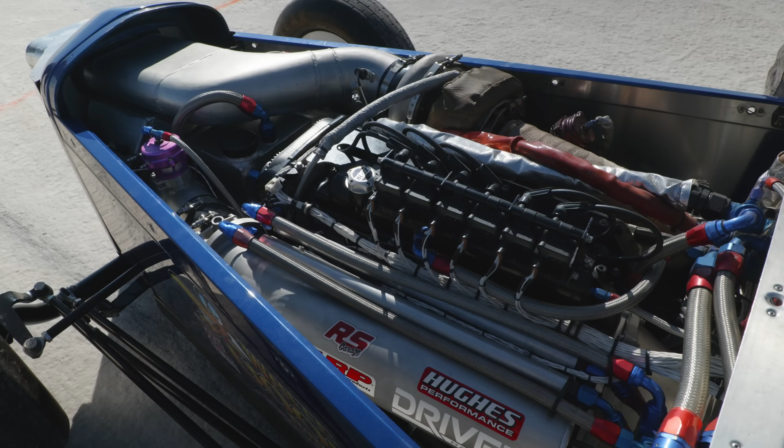First, we're going to jump into Greg Waters' 369 Roadster. The 369 Roadster is powered by a factory block 2JZ with a bunch of Brian Crower goodies that you can purchase through RS Garage or just have me build you an engine like it. It has a Dailey dry sump, VVTi cylinder head, Precision 8685. It's backed by a stock ratio TH400 trans with a 2.49 final drive, so long gearing.

And one of the things you'll notice at Bonneville is the vehicles are being pushed off the starting line. So this particular vehicle gets pushed to around 45 or 50 miles an hour. Driver floors it, the race time starts, and the run begins. I say race time because it's an interesting metric to look at how long the run is. So when he lets off his throttle out here, he's around 70 seconds of wide open throttle operation.

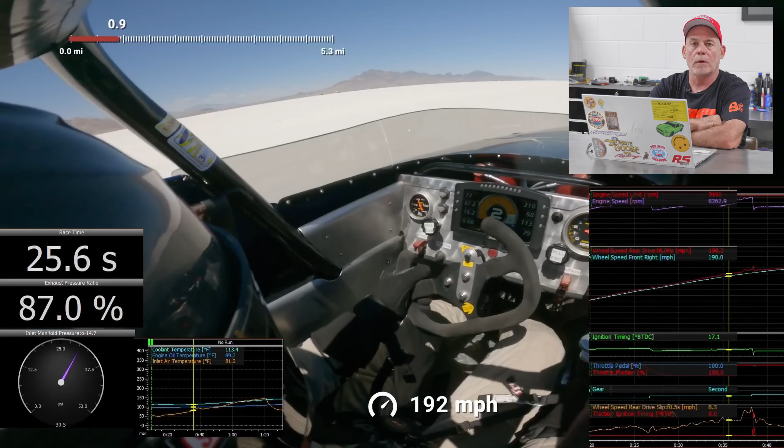And that's what really separates running a vehicle at Bonneville versus a drag racing environment or a chassis dyno environment or an engine dyno environment, is you have your engine and your tuning in a real world condition under real stress, accelerating the vehicle to get a time slip. So, you know, as the dyno crazes over the years have come and gone, the one thing that everyone that worked for a time slip got was a time slip. And that's a real metric of how the vehicle performs.

And this particular run, to go as fast as we did with a small engine Roadster and get that time slip is quite an accomplishment for the group. And some of the men in the camp that have larger engines came over and said, wow. And it's a pretty big wow. So T4 turbocharger, 2JZ, methanol, MoTeC, neat combination of parts, and a pretty good running engine. So let's jump into the run.

As far as spooling up that 8685, if you look down here, we've got over 15 pounds of boost available, just over 5,000 RPM. So pretty good response.

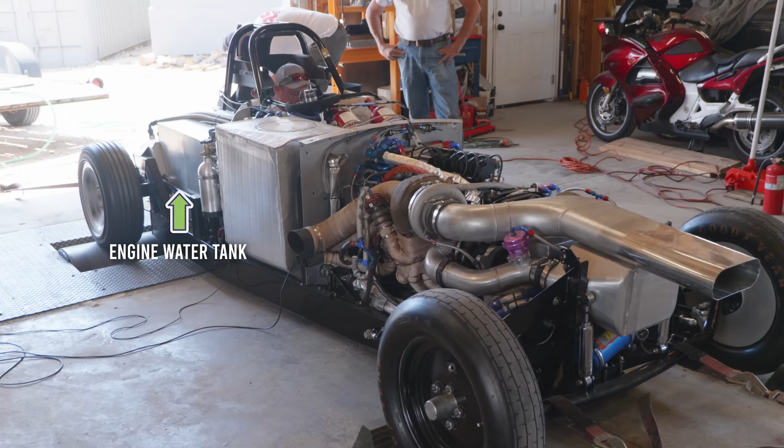While we're at the beginning of the run, let's also take note of the coolant temperature and air inlet temperature and the crankcase pressure and the oil pressure, because as the run goes on, some of those things start to deteriorate and some of them stay pretty good. So this car does not have a radiator. It's just a high volume coolant tank. And it does have an air to water intercooler with a big ice chest to help maintain these IATs over the course of a run.

The IAT sensor is a fast response RIFE sensor, so we are using good data, which is going to help us keep our fueling in check, as the MoTeC is a speed density system, and it does take the actual air inlet temperature into account when it's doing its math.

So start of the run, 93 pounds of oil pressure, 65 kPa of crankcase pressure, 49 degrees of inlet temp, 114 degrees of coolant temp, around 15 degrees of timing, 12 pounds of coolant pressure. So we get to the top of the gear. We now have almost 37 pounds of coolant pressure, and this may seem like a large number. This engine has a 3-inch diameter water pump impeller. We're moving a lot of water, as much as we can.

And we want water pressure present because in a perfect world, everywhere inside of that engine would be relatively the same temperature, and you'd avoid localized heating. And how you avoid localized heating, which will then allow cylinders to lose control, is lots of water flow, lots of water pressure. That way you're scrubbing that water against the aluminum, scrubbing that water against the cast iron, trying to carry as much heat out of the engine every time the water enters the engine compared to when it exits the engine, so that you're scrubbing heat out of the inside of the engine.

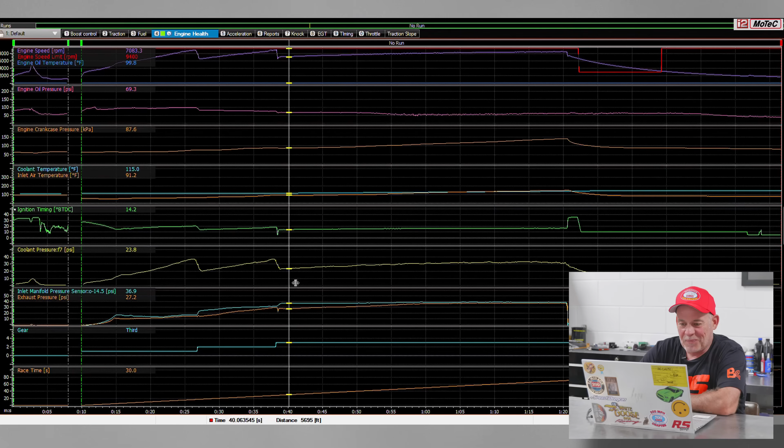As the car makes its way down the course, you can see the exhaust pressure and boost pressure get closer to one another, and we end around 39 pounds for around 37 and a half pounds of back pressure. Our oil pressure, however, has now decreased to 63 psi. Throughout the week, we moved through a couple different brands and a couple different weights of oil, trying to figure out if there was an advantage to be had. We ended up back in our Driven 1040, mainly because the oil condition at the end of the run was better than the other brand. It wasn't milkshaking with alcohol. The oil was staying pretty dang clean, which is pretty impressive.

Our inlet temps have now swelled up to around 144 degrees, and our coolant temp is up around 137 degrees. Ignition timing out the back is almost 17 degrees. On the dyno, this engine wanted 19 or 20 degrees. Were we over timed or under timed? Maybe. We can tie in some of this knock data that we have here. We're not using the knock control as closed loop, but we're collecting data, and pretty consistently in second gear, we've got some noise coming out of number 6 and some noise coming out of number 4.

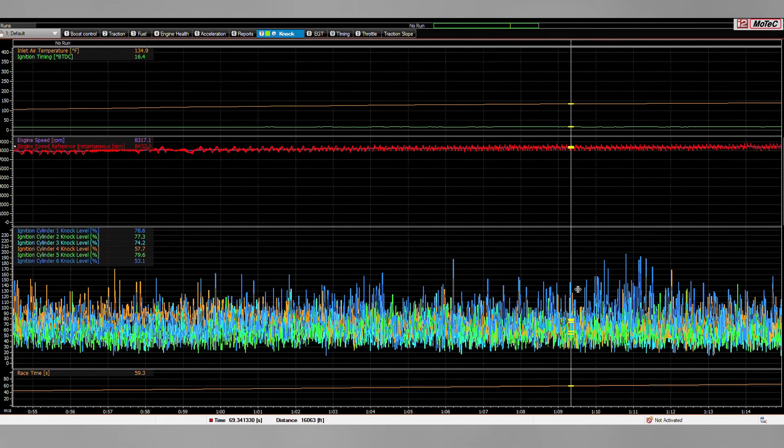And as we get out here in high gear, we have a bunch of noise coming out of cylinder number 4, and then it's sprinkling along with cylinder number 6. So you have some cylinders that are very quiet and some cylinders that are very loud. And knock tuning, especially on alcohol, can be tricky, and you have to run the engine and look at the parts. So we weren't collecting any aluminum on the spark plugs. The spark plugs weren't overheating.

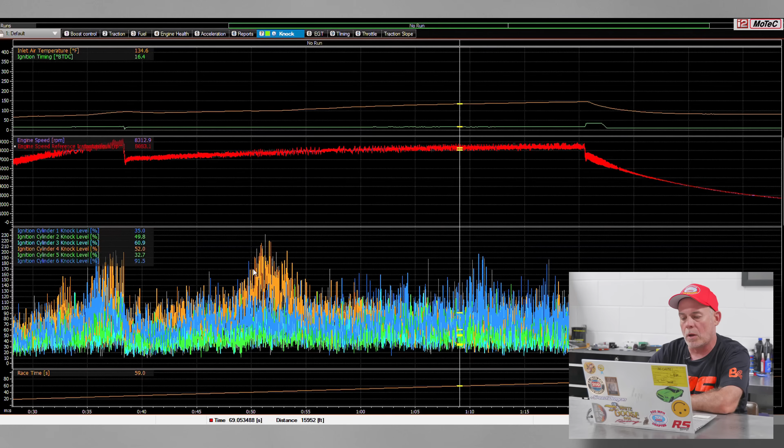But when we take the engine apart, we'll look at these bearings and say, hey, do we have anything going on in number 4? Do we have anything going on in number 6? And kind of take that information with us to move forward.

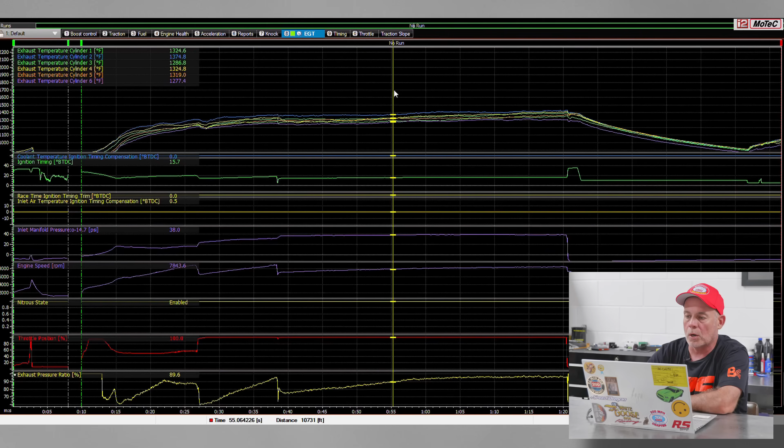The car also has exhaust gas temperature sensors. So number 2 was a bit warmer by about 100 degrees throughout the run. These temperatures are 300 to 400 degrees cooler than what we had when we were running the car on gasoline or ethanol. So the methanol is a lifesaver when it comes to managing heat, but our pairing isn't as tight as we'd like to have it. And some of that may be ignition related. Job and Brett worked together this year to do some testing on his snot rocket, and they ended up with a CDI box, which improved some of the exhaust gas temperature behavior and less misfires.

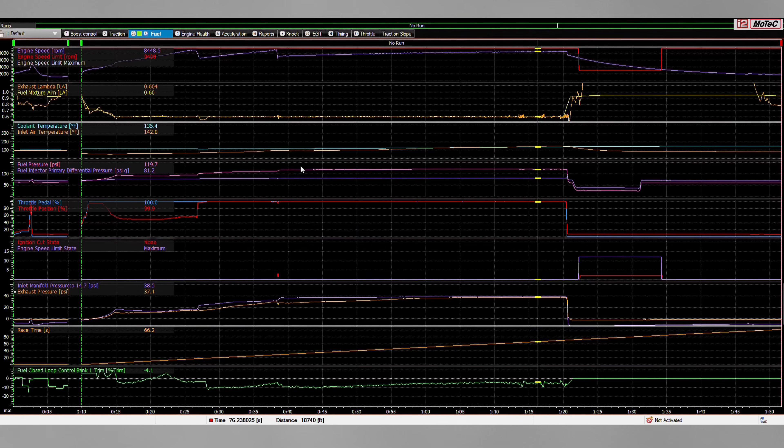If we look at the fueling real quick, we can see out here, we've got these couple bunches of fuzzy lines in the lambda. And if we zoom in on that, you can see that we had some racket going on here. And this could just be misfires. So we're going to change the ignition system and try to get rid of some of these fuzzies in our lambda. If you look at the lambda trace throughout the run in high gear, it's fairly consistent.

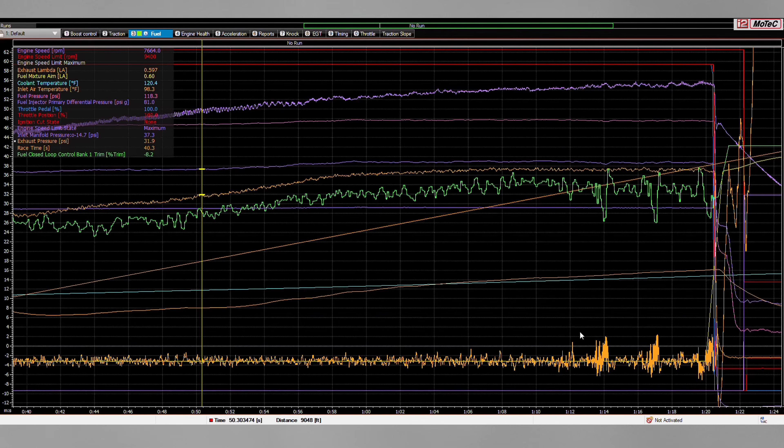But out here, we've got these blocks of fuzzy and these big trim swings in the closed loop. So we went from closed loop numbers that were fairly small, 4, 5, 6%, and then out here, we had almost 10%. And we could be incurring some misfires that are influencing this change here.

The traction was fairly managed. A gorgeous run. One of the runs that you're like, hey, that was a run. Again, I'll keep saying it because I was waiting for this time slip for some time. But we have a little bit of wheel spin in first. Nothing crazy out there at Bonneville. If you're under, say, 15 miles an hour worth of slip, you barely feel it. He did have a little bit of slip at the top of second gear. He never lifted his foot off, but it was happening.

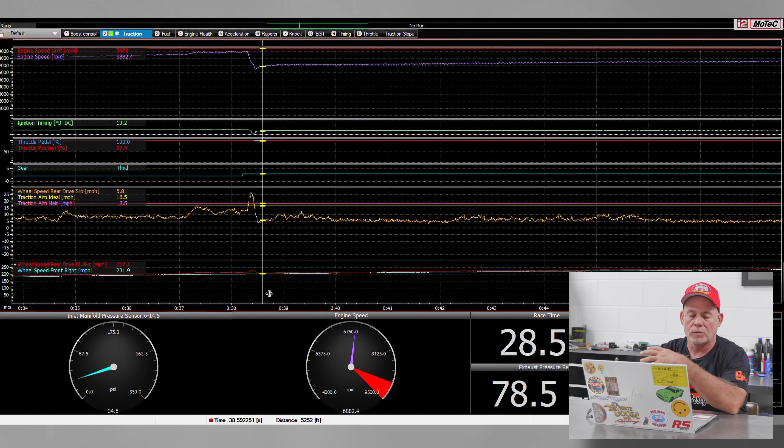And as he goes into third gear, there's just a little dip right here where the traction control pulls some timing out as the wheel slip goes up over the threshold. So on the 2-3 gear change, it did wick the tire loose. The computer responded, pulled the wheel slip back down, and away he went. But pretty cool run out of the Roadster.

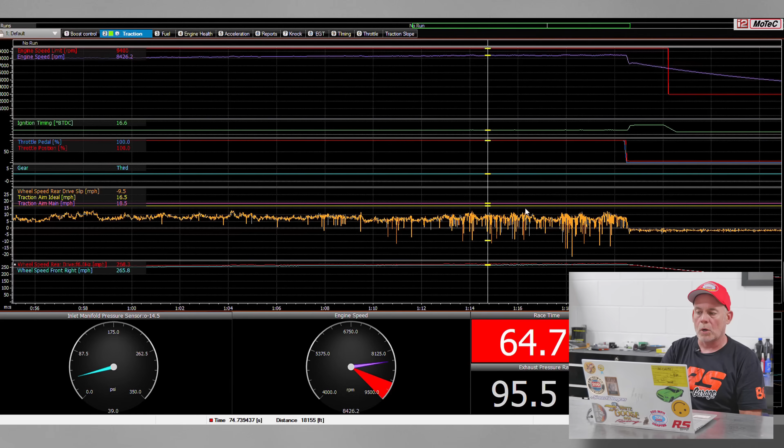Before we move on to the liner, if you're catching all this fuzzy out here, if this is bothering you, it's not real. Tuning wheel speed sensors on these vehicles, you got to run the speeds. So it's a game of try this, make it run, try that, make it run. This car has pretty good wheel speed data until around 250 miles an hour, and then it just gets crappy. We're going to work on that a little bit and try to get it cleaned up. All you can do is tune it. This is one of those things. A race car evolves over time. But that's our 369 run.

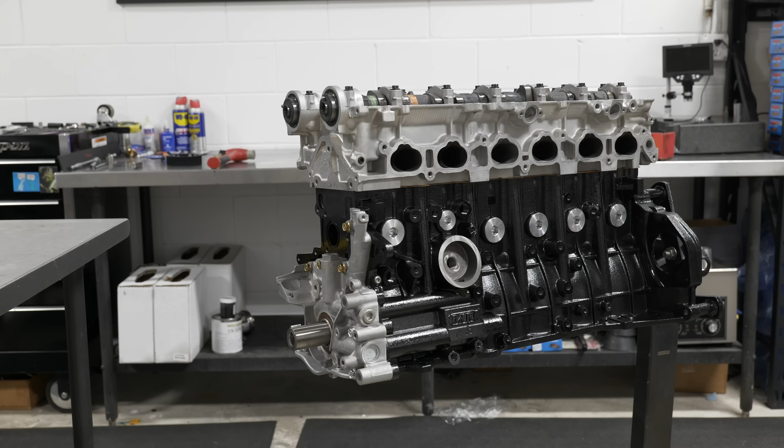Next, we can take a look at Brad Bosworth's 987 Valley Fever Streamliner. The Valley Fever Streamliner is a mammoth of a vehicle to get the pilot, and it's powered by a Dart-based 2JZ with 2 Precision 6466 turbos. It's got a Liberty equalizer, 5-speed, and a quick change rear end. The gearing wasn't quite right on the car, so we did cross in 4th gear.

There's a 13% drop between 4th gear and 5th gear, and by the math, the car was geared for around 450 miles an hour, and I don't think it's going to do that anytime soon, but it is a capable 400 mile an hour vehicle, which is pretty amazing considering the engine platform and the time that we've had to run the car and practice and get to learn it. So a lot to be proud of.

As we move through the log, keep in mind that this is an F-class engine. So an F-class engine is going to be the displacement class that the engine is in. So if you look at different cars out at Bonneville, there's AA cars, the big engine cars, and then there's going to be H cars that are the small engine cars.

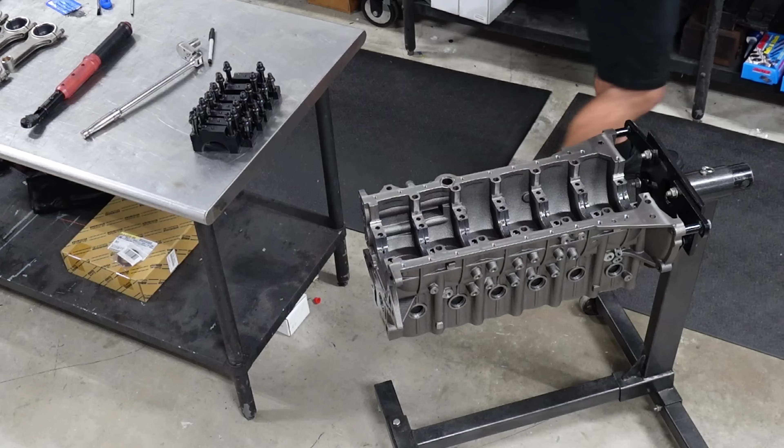But basically the way that the rules are set up, the letter designates a range that the engine displacement can be. So for us, moving into a new Dart block, we wanted to be able to overbore that engine over time as it needs to be rebuilt, but not leave the F class. So what we did is we had Brian Crower build us a couple of 84.5 millimeter stroke crankshafts. So we moved the piston a little bit less distance up and down the bore, which reduces the engine displacement, but allows us for future rebuilds for a larger bore size.

So F2JZ, around 8.5 to 1 compression, steel, Brian Crower 6309 HD connecting rod, Dailey 7-stage dry sump. We messed with some different oil weights while we were out there. We battled with some crankcase pressure problems like we did on the 369 car, but all in all, the vitals stayed fairly consistent throughout the run, except for our record return run.

We did add a quart of oil to the system. We overfilled the system, which solved some problems. You really can't get enough oil in these cars. You take an engine and you rev it up, and the oil gets worked hard. So, incredible place to test your parts, but hard on stuff at the same time.

As we move through the run, keep in mind that the rear wheel speed sensor was not operable. So we don't have the correct calculated gear on the dashboard, but the MoTeC is going to make gear changes around 9,200 RPM, and there's not going to be any traction control involved, so I do have to move my foot around in first gear to maintain traction. But after that, as soon as I went into second gear, I really wish I would have had 5 or 6 more pounds of boost on tap, because it barely spins the tires through peak torque in

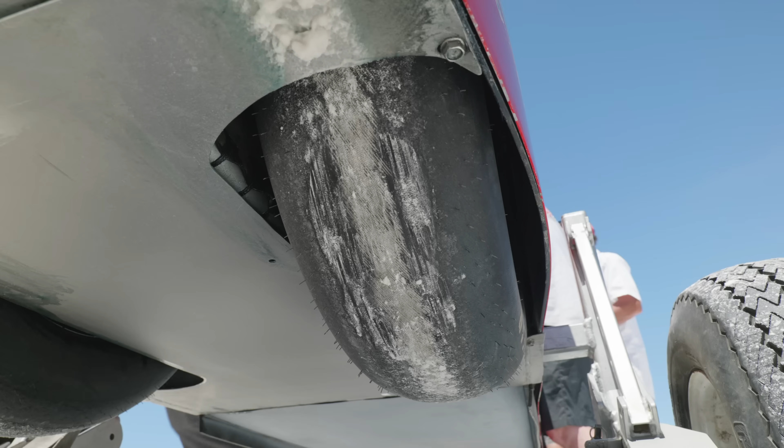third gear. And in fourth gear, if you look at the engine speed line, there's a bit of a crest through the middle. That's where the engine's turning the tires the most. But overall, decent amount of traction throughout the run. It actually went through a set of tires in one run. That's how hard the salt was this year.

Again, tall gearing, so you leave the push truck when you can. So when we come off the push truck, the engine starts to accelerate, but it's not very fast. When I leave the truck, it's pretty lazy, and this is an 80-second run in total, but all this time is just wide open throttle. So if you're gonna make any last minute adjustments before the turbos come in, now's the time to do it. We don't make any boost until around 15 seconds into the run, where you see the engine speed perk up.

That's about where the manifold pressure comes up. So right there, we get a little spike of boost, say about 16 pounds of boost. It starts spinning the tires, so I take my foot out of the throttle and I find a throttle position that allows the tires to be hooked up. And as we go towards the top of first gear, I'm working my foot back into the throttle, and then the gear change is made right around 9,200 RPM.

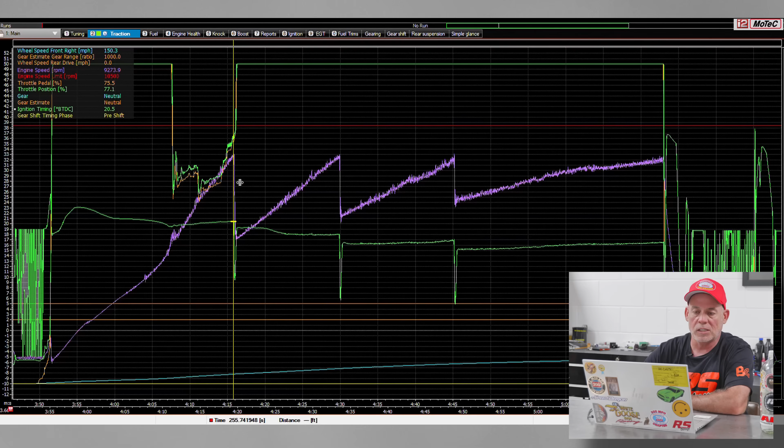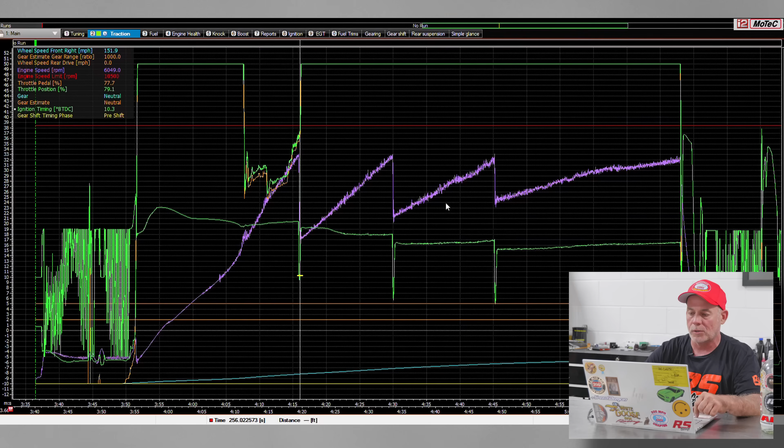There's a fairly big pronounced dip of ignition timing on the gear change. If you look at that right there, that's the MoTeC taking power out of the gear change to save driveline parts. Last year we broke a shaft in the quick change, and we didn't want to do that again, so we just let the MoTeC shift the car, and the MoTeC will suck a bunch of timing out and then add that timing back in over time. So the timing comes out fast and then goes back in slow, and you can set all this up however you like in your MoTeC system. But these big dips in timing are to help save the driveline.

If we look at the boost curve as the car moves down the course, at the top of first gear, we had around 18 pounds of boost. At the top of second gear, we had 37 pounds of boost. And as we get into third gear, say by, let's call it 7,600 RPM, we have 40 pounds of boost available. And that 40 pounds keeps swelling.

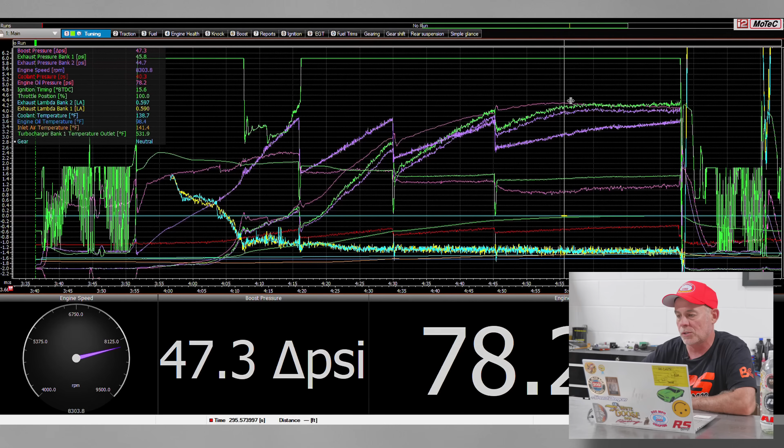The top of third gear, we're 44 pounds, and then we're in that 46, 47 range. And one of the things that we can talk about real quick is the behavior of the turbocharger and the pressure ratio that the turbocharger is working under. And if you look at the manifold pressure, there's a bit of a crest here. This is how the turbocharger kind of naturally wants to behave. The CO2 is targeting a dome pressure, not a manifold pressure.

And if you look at the back pressure on the system, or the exhaust back pressure, this is when the turbocharger is around 1:1. And as the engine speed increases, the manifold pressure actually drops down a bit, because it just can't fill the hole. You need a larger turbocharger. So even though this car has two 6466s, it would benefit from a larger set of turbochargers, which is pretty crazy considering it's just a little 2JZ.

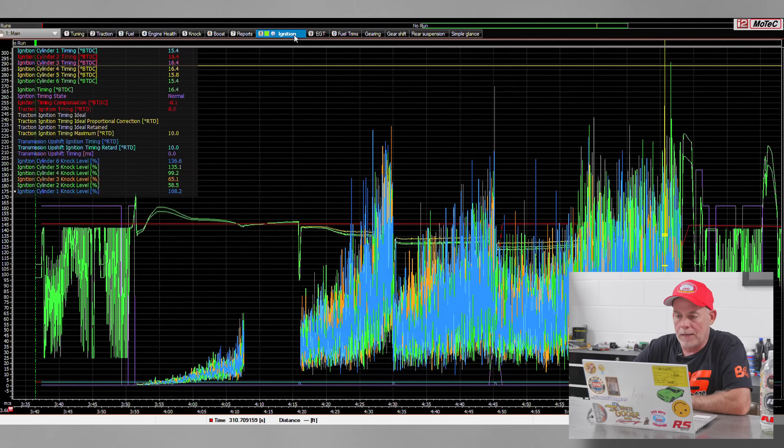The knock data, just like the Roadster, there's a bunch of information here. What do you do with it? You can do whatever you see fit. I do have some timing correction available in the ECU throughout the cylinders, but there's knock noise. It's happening. So what's real knock and what's not real knock, you have to keep working on the engine and figure it out. It doesn't break the first time you knock it. And if you're using a gasoline-based fuel, you can knock an engine on purpose on the dyno and understand what actual knock looks like, and then move forward with your tuning.

For us at Bonneville, we're collecting the data, and we can compare it over a course of events to kind of find out what's real and what's not real, because between those events, preferably we're looking at the engine parts and seeing what they have to say about how they're living.

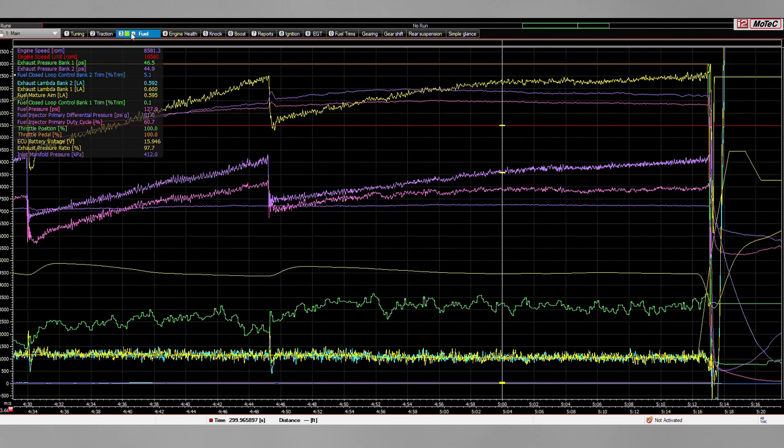This engine is controlled in two banks. So you have the front bank being cylinders 1 through 3, the rear bank being cylinders 4 through 6, and there's a fuel trim difference as you look down this engine. So once we're in high gear, our front fuel trim is pretty tight, you know, plus or minus a percent, which is pretty good. But the rear trim is 4 or 5%.

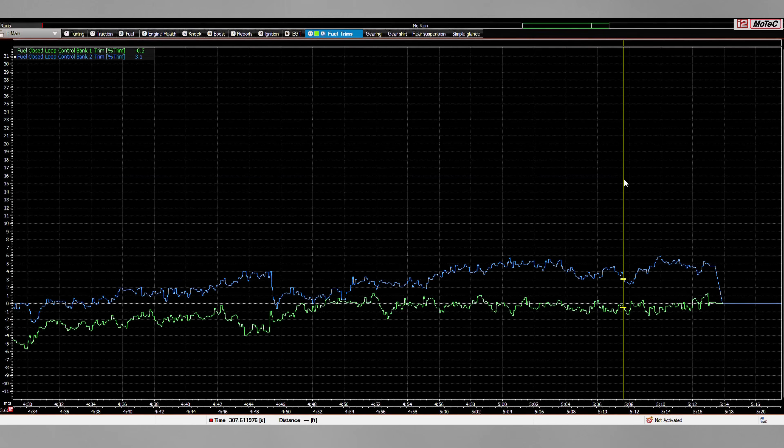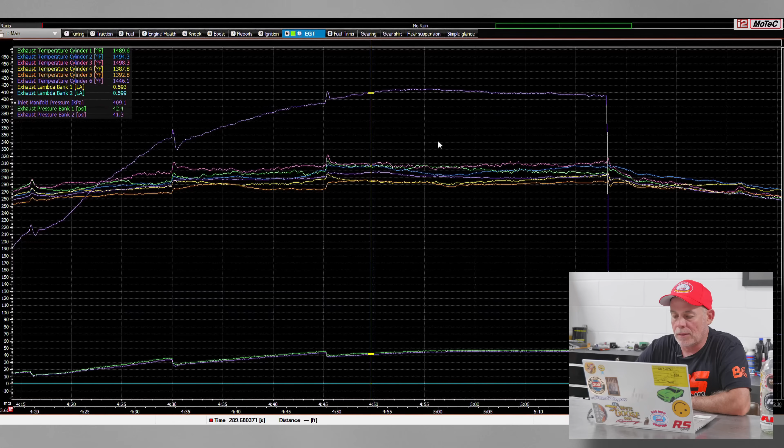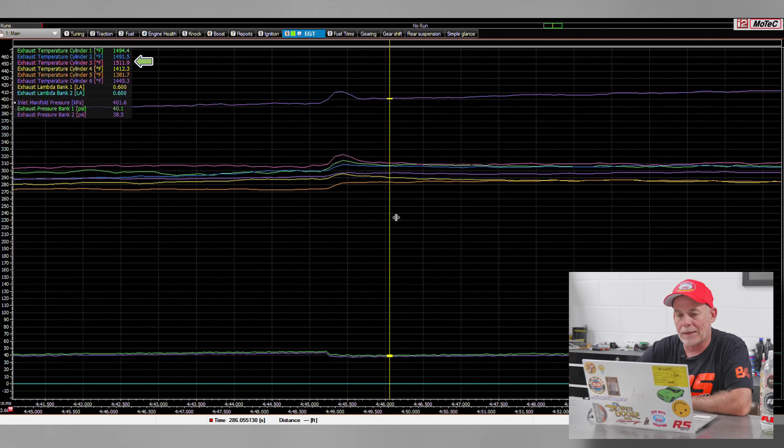So when you take that information and then you look at your EGTs, if we pick anywhere in here, cylinders 1 through 3 do run a bit warmer on EGT than cylinders 4, 5, 6, but they're all fairly consistent, and there's not any terrible trouble going on. If you want to see how quick the EGT reacts, you can see this little swell in temperature where if we pick number 3, 1495, and then 1569, and then back down around 1500 degrees. That's that timing retard on the gear change.

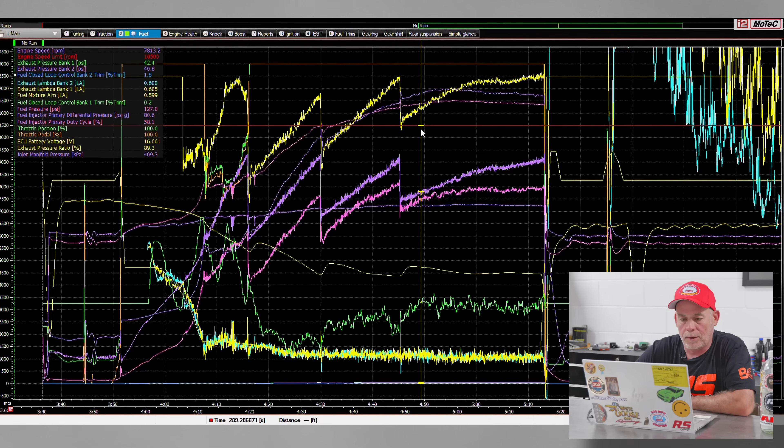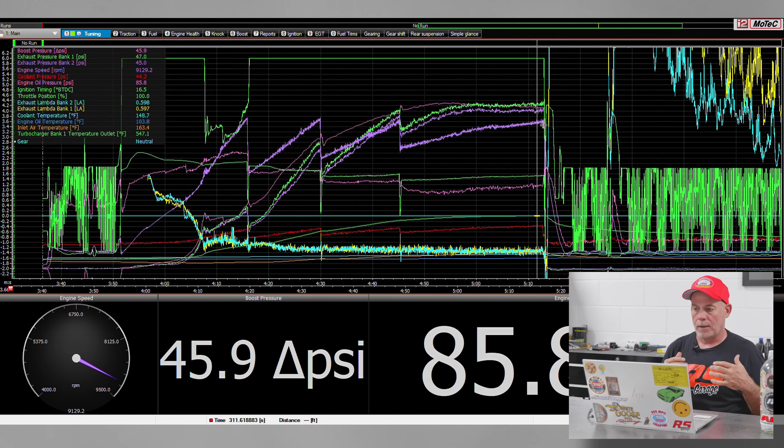So is the engine under timed for the conditions? Maybe a little bit, but it's just a tuning process. So the next time the car's out, we may put a little bit more timing in it. If we look at our ignition timing as a whole, we have high teens, mid-teens, mid-teens, mid-teens, down to 15, 16 degrees at the end of the run. So the move would be to put a degree of timing in it, run the vehicle again, see if it accelerates harder, see if the knock data changes, see if the EGT data changes.

But this is one of the benefits of these long runs under stress, is you get to collect so much information. And this car will now go to that level 3 logging where you have 2,000 channels, 1,000 samples a second, to where we'll be able to have these huge data banks of information, but nonetheless, a pretty cool collection of information as it goes.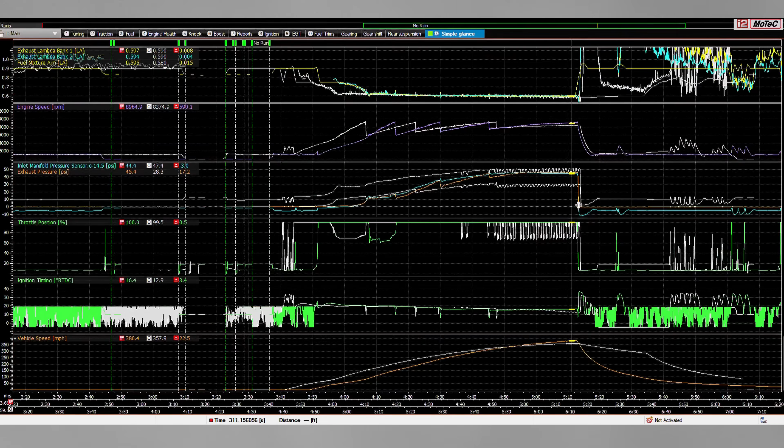But the rate that the vehicle decelerates is pretty impressive when you look at those two things. Another thing between this run and our qualifier run was the rear wheel speed was causing a bunch of havoc, where the throttle was opening and closing, manifold pressure was moving up and moving down, because most of the aims are based off of speed and gear. Well, when you lose a critical sensor like rear wheel speed, the functionality of your tuning may change.

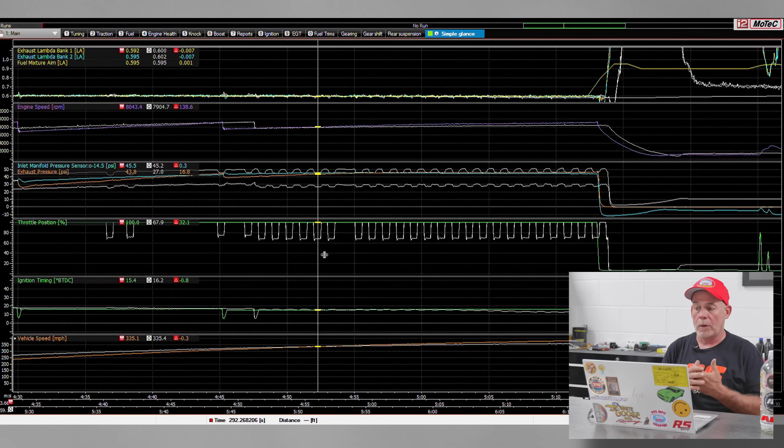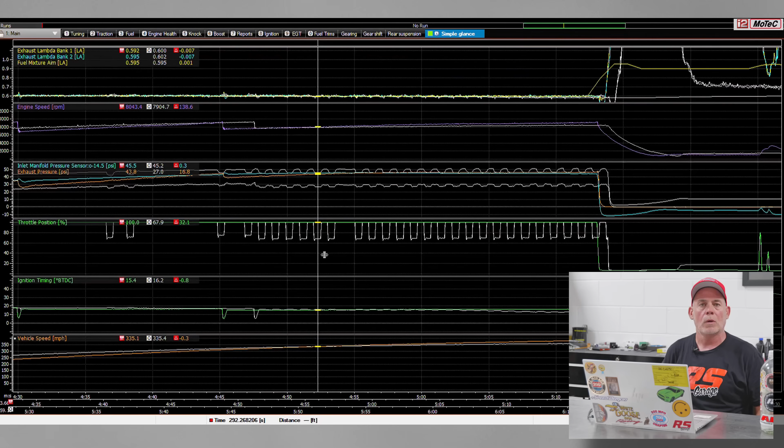So we were fortunate, like I said in the video, that the throttle didn't fault, but the throttle was moving open, close between around 70% and 100%. It just fortunately didn't fault, because that would have ended our run, which would change the whole course of the week. So pretty interesting there.

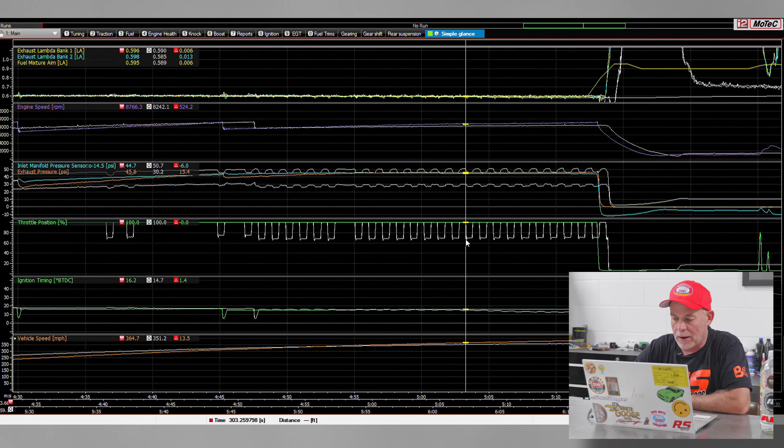But you can see that during the 2 runs, as we come out here, we were able to match the speeds earlier on with our acceleration. So if we take this run and we overlay it, we were pretty similar acceleration until we moved into 3rd gear. And then as we move into 3rd gear, we start to out accelerate the run we made before, putting another, say, 30 miles an hour onto the run, which is pretty awesome.

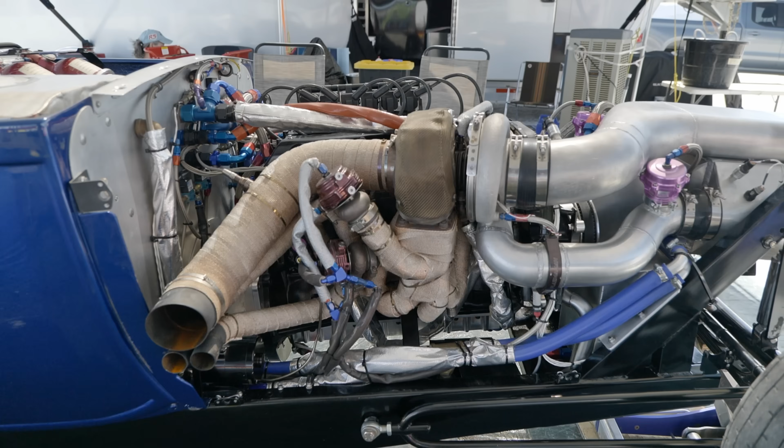This is an 8685, again, with about a 1-to-1 pressure ratio. And if you move from, say, 7,500 RPM at 109.2 out to 9,000 RPM at 102.9, you kind of see how the high RPM efficiency trails down. And there's some discussion to be had because you have a single 85mm turbine versus two 66mm turbines, and you start thinking through gas flow and whatnot, and there's a bit of a difference because both engines have the same camshaft profile, just one of them is a VVTi and one is not.

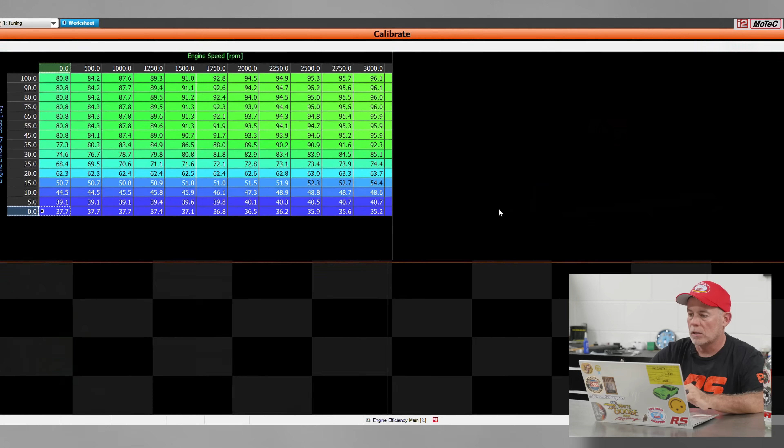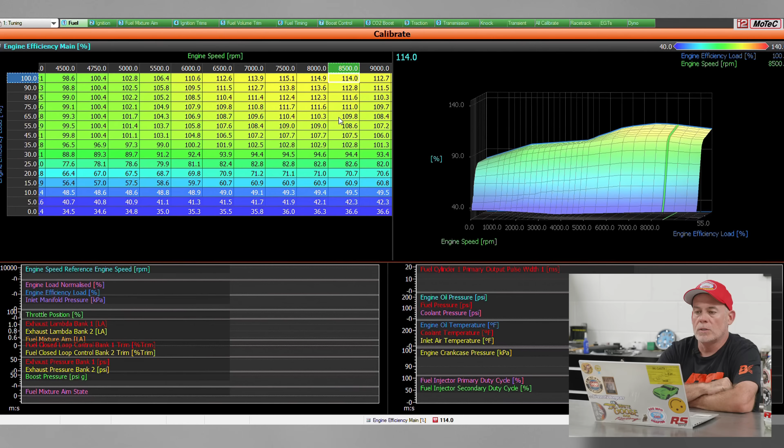So if you move over to the liner, which is a non-VVTi JZ, you have a fuel map that looks quite a bit different. So you've got this area where there's not a lot going on. This plateau through here is just before the turbocharger spool, and there's not a lot of efficiency to be had. And as you move into some turbo spool, and we go back out to that 7,500 mark, we have 115.1, and as we go to 9,000, we fall into 112.7. So we have three numbers.

Now, again, these are broad strokes. The numbers themselves are going to vary due to injector calibration, whether or not both cars have the same exact injectors, and they don't. So there's a discrepancy there, but what you're trying to kind of gather up is the difference between when each engine program moves less air.

And it would be interesting to take this one step further and build a smaller JZ with more airflow as far as turbochargers go and see where we end up. So, you know, we're talking about building a sub 2-liter JZ for the Datsun, and it'll be interesting to see how that plays out in terms of efficiency.

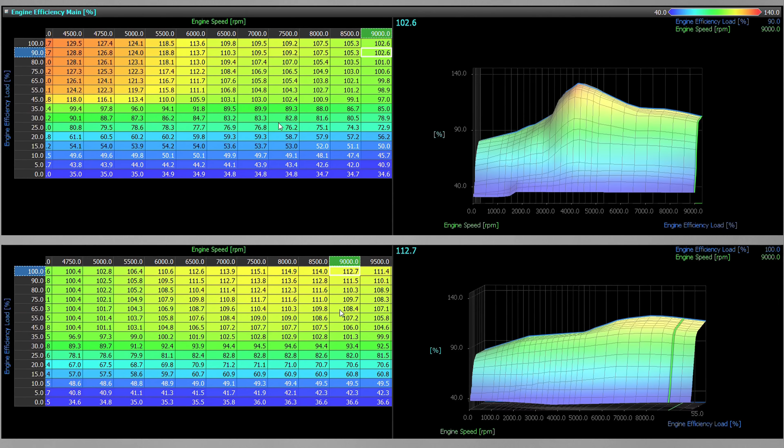And again, out there, it's not a game of spooling the turbos. It's a game of making the most power in the operating range of the engine, and you're not on a road course, so turbo lag's not really your enemy in this case. You're just trying to make the most amount of power possible, but it's pretty cool to see the differences between those two fuel maps and how they play out.